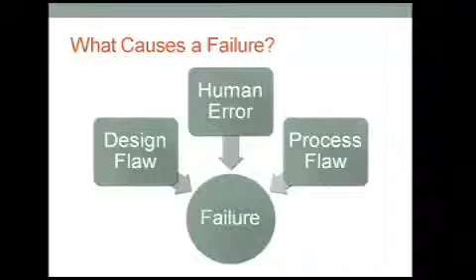Now, when you look at this simple diagram, the mirror image of it represents the components to success. What are the components of success? A good design, a good product that you're using, a good process that you're using to assemble the products, and of course execution - flawless execution. Those things are pretty critical. What I want to do is take a look, in terms of those simple concepts, at what apparently went wrong on this well, and then how we build our practices going forward to try to keep this from going wrong again.

Okay, first off, and this one has been overlooked and maybe not stated as clearly as I'm stating it right now: the float equipment failed in the well. To me, that's very, very obvious as a drilling person. The float equipment failed. If the well blew out up the casing, the float equipment is there as a barrier, and it failed. Why did that happen?

Is there a design flaw in that float equipment? Were there process flaws that were involved in the selection of that particular piece of float equipment? Did something go wrong there, or was there simply a human error in the installation of that float equipment that kept it from working properly?

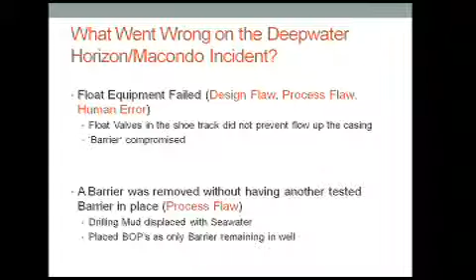When the float valves in the shoe track don't work following a cement job, that is not a good situation, and it's even worse when it goes unrecognized, which is apparently what happened in this well. So there's one barrier compromised. Did it cause the incident? No, it's the kickstart to the incident right there.

The second one that I have listed here: a barrier was removed without having another tested barrier in place. Throughout my career, that's what I was taught not to do. One of the fail-safe practices and processes that we have to follow as a drilling engineer is to make sure that if you remove a barrier from a well, there's another barrier in place before you remove it. That's a process you have to follow to make sure that works right. And that clearly failed in the Macondo.

And that one is a pure process error. The sequencing of removing the drilling mud from the well and putting seawater in place was wrong. And that's a very severe flaw.

Now, as I'm going to show in a little while, these are issues, when you start having process issues, that at some point the regulatory agencies have to come in and help prevent these types of process flaws. And when that happens, when the drilling mud begins to be removed, you've already compromised one barrier in the float equipment. You take the drilling mud out of the well, and the last barrier in the well becomes the blowout preventers.

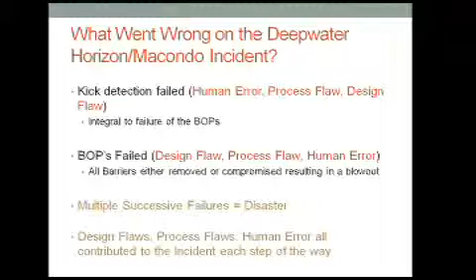And I'll talk about that again in a second. And then finally, the BOPs failed. Now this, from my perspective as a drilling engineer, and a man that's been on the rig as a company man and has had people working for me that I've known for years as company men, that's a very terrifying thought to have a BOP fail on you, because that is your fail-safe.

So my question really is, what happened with the BOPs? I don't know that answer yet. I haven't seen any study outcome of what happened with the BOPs, but it's a very, very worrisome topic that you went to function the BOPs and they didn't work.

And of course, in that system, is there a design flaw? We need to know that. Is there a fundamental design flaw in the way the BOPs were thought out that doesn't work in deep water subsea environments? Was there a process flaw? Were there process flaws in the way those BOPs were tested? Are we testing our BOPs correctly? And that's a comment I'll further in just a second.

And then, of course, finally, is there a human error component? I would say in both of the cases of the kick detection and the BOPs, the kick detection I think is primarily human error and process error, probably equal amounts of both of those. But with the BOPs, I think design and process are probably the two key points of those failures.

What happened now involved multiple successive failures, and people said this from day one of the blowout. This wasn't one thing that went wrong. There were multiple successive failures that led to this disaster. These are the four successive failures that happened, in my mind, and this is not an overly complex set of conditions that led to the blowout. This is actually a fairly simple explanation of what went on, other than the BOP failure. But if you look at it, there are design flaws, process flaws, and human error every step of the way that led us to the point of the blowout.

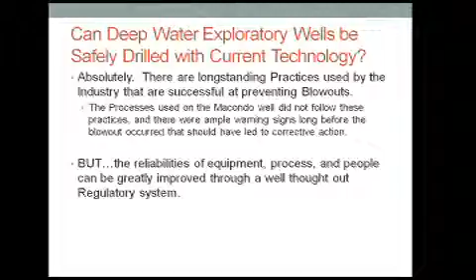Okay, in a conclusion slide, one question: can deep water exploratory wells be safely drilled? Yes, we've done it. There are a number of people sitting in the room who say, I do this every day. Is it 100%? No, I don't think so. I think there are people out there that don't have the capacity to do it safely well after well. And I think we're going to have to work with the government, with regulatory agencies, to get the reliabilities in our designs, our process, and our people up to speed to make sure something like this never happens again. Thank you very much.

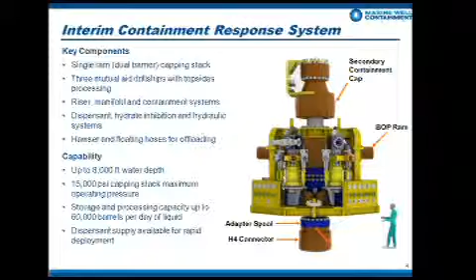A dedicated dispersant supply will be part of this system and will be available for rapid deployment.

The expanded response system has similar features, and I should say that some of the equipment in the asset inventory for the interim response system will move to the expanded response system as we get other assets for that system built and ready for deployment.

But one main difference is the capture vessels. For the expanded response system, the capture vessels are dedicated vessels, whereas before it was drill ships through mutual aid. In the expanded system, we'll have 2 modular capture vessels. I'll speak in more detail about them on a later slide, but they are dedicated for the service in the expanded system. They'll need to be modified for topsides processing facilities, and that's part of the scope in the project development of the expanded system.

This system will have freestanding risers and manifold systems, enabling it to operate in deeper water depth. It will also have a 15,000 PSI subsea containment assembly, which in the expanded system is a 3-ram or 3-preventer type capping assembly, whereas in the interim system it was single. The storage and processing capacity in the expanded system is up to 100,000 barrels per day of fluid, and again the dispersant supply is dedicated and available within this system as well.

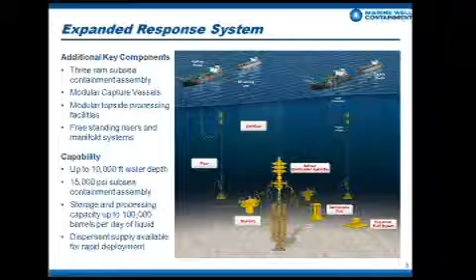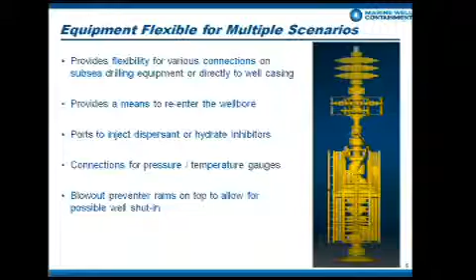I mentioned the word flexible in an earlier statement, and that can be indicated by at least a component shown on this slide. This is a depiction of the ultimate expanded system capping stack. The idea is that we will have adaptation for this capping stack to be configured or mated to whatever the conditions may derive on the day of deployment.

It will provide a means to re-enter the wellbore. It will have ports for injection of dispersants or hydrate inhibitors, and connections for pressure and temperature monitoring devices. Obviously we'll have containment type preventers in the stack to allow for a possible complete shut-in.

Some modifications are required, namely dynamic positioning systems, and these vessels need to be outfitted with topsides appurtenances to accept processing modules that then connect up to subsea riser systems, allowing the contents to flow to the capture vessels to be separated, the oil and gas separated, the gas flared, and then safely stored and offloaded to a shuttle tanker.

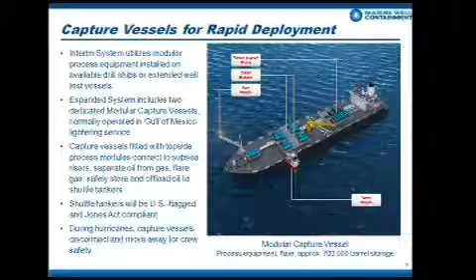Clearly, to operate in the Gulf of Mexico, we need to be configured to manage weather events such as hurricanes, and these capture vessels will be outfitted in a way where quick disconnect can be managed safely, reliably, and without additional incident complications, to move away from the weather-affected area and get the crews to safety.

Well, that's a quick run-through of what the company is about and the system that the company is interested in and also diligently working toward. Our view is that the company and that system will provide us a solution to meet the containment requirements and response requirements that we see in our drilling permit application requirements today.

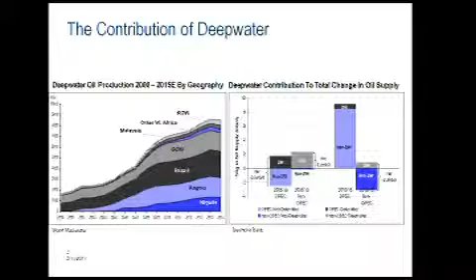I think we heard very succinctly this morning about what's at stake when it comes to deepwater. You can see the remarkable growth on the left-hand side of the plot of deepwater production from the turn of the millennium through today, and this graph forecasts 5 years into the future as well. On the right-hand side, this analyst is forecasting that deepwater will contribute about 25% of the incremental net oil production over the next 5 years. So there's a lot at stake, as was said this morning.

With regard to technology, when you look at the graphs I showed you, particularly the one on the left, you could conclude this is a new industry, and in fact it's not. The offshore industry has been around since before the turn of the last century, 1897, as you can see, and even earlier than that. And as pointed out this morning, just over 60 years ago, the first well was drilled out of sight of land, a very important point in the offshore industry.

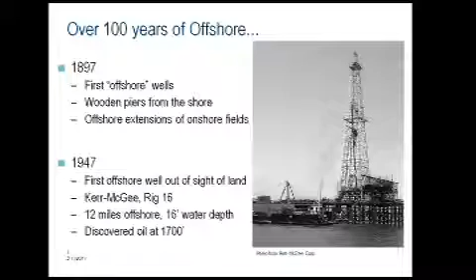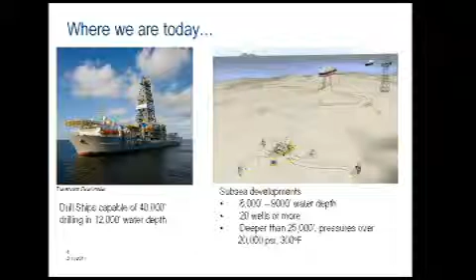So where are we at today? To me, the technology we're using offshore is extraordinary. Really, what the industry has been able to achieve is absolutely remarkable. A state-of-the-art development today would be in 8,000 feet of water, with 20 or more subsea wells, pressures at the reservoir—not at the wellhead—of 20,000 psi and greater, and depths certainly over 20,000 or 25,000 feet.

There's obviously a lot of challenges involved in offshore deep water drilling, and we chronicled some of those earlier today. I should point out that the sector of the industry I'm involved with is very much the subsurface. The challenges I've detailed on this slide are specific to drilling, and don't encompass challenges around exploration, development, production, or long-term life of the well. But as you look through these challenges, particularly on drilling, you can see there's an awful lot that faces the drilling engineer, as we heard earlier in the sessions.

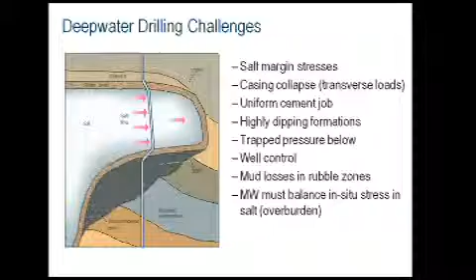In this particular case, for example, we might be required to drill through thousands of feet of salt. As we exit the salt, we go into a different type of formation, often a rubble zone, and often a zone of lower pressure than what's required to drill through the salt. As a consequence, you end up with significant losses of mud, and that's just one particular example.

So in the context of the panel we're in right now, I thought I would describe at least one technology, in maybe a little different direction than some of the others have taken, that can help manage and mitigate risk in deep water operations: the ability to understand what it is that you're going to face as you're drilling through the formations. In other words, the ability to plan, to map out, to look ahead, and understand precisely when you're going to hit one of these transitions where things may be overpressured or underpressured, which may eventually result in issues that require a sidetrack, or worse, an abandonment of the well itself.

One of the technologies often touted as one of the most significant game-changing technologies in the industry, and certainly very few in the industry wouldn't rank it in the top 10, is 3D seismic technology. That's the ability to send acoustic information, or sound waves, through the formation, or in the offshore environment, through the ocean and then through the formation. That sound bounces off all the various formations or strata underneath you, and sends back thousands, millions of signals to an array of receivers at surface, called geophones. That information is compiled and analyzed with a series of complex algorithms, and with that information we can construct a picture of what's below us before we ever go there.

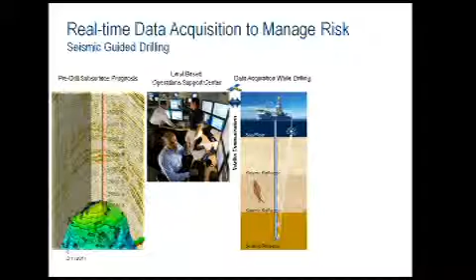And the model becomes more and more precise as you get further and further into the Earth. As a consequence, in this particular example, we have this formation of interest, which was originally picked at 30,000 feet, has actually been migrated up to 29,000 feet well before we actually got there.

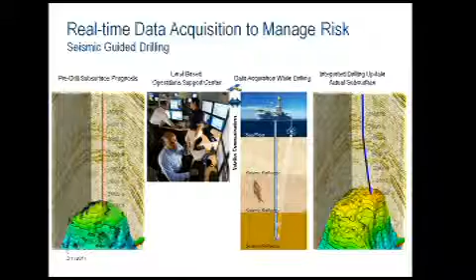I think a good analog to this is like headlights at night. Without them, there's very little that you can see. With them, you still don't see the mountain range that's 10 miles ahead, but you can certainly see around the corner before you get there. But the real point of this, and this is just one example, is I feel an area of technology that's quite important is understanding where it is that you are before you actually get there, so you can design that into your programs well in advance. The example I gave earlier, exiting the base of salt - if you're prepared for that, an operator can quite easily and safely and consistently make it through the base of the salt. If you're not, it historically has caused problems in the past.

Looking forward, as mentioned even by Director Bromwich earlier, there's a very good chance that we're going to go deeper, to older geologic time horizons. When you look at the technology, at least in the sector of the industry that I'm involved with, that has implications. We're going to have to image deeper with higher resolution, and that will be a challenge.

But another more practical matter is that the pressures, and in some cases the temperatures, of these formations are going to be higher and hotter. So the tools we use to acquire this data and drill, and the way we complete these formations, will have to be capable of doing so in those higher pressure, higher temperature environments. A big part of our new product development program, and the new research in the industry, is around developing that higher pressure, higher temperature equipment. You'll see quite a bit has already come out over the last several years, and much more is to come.

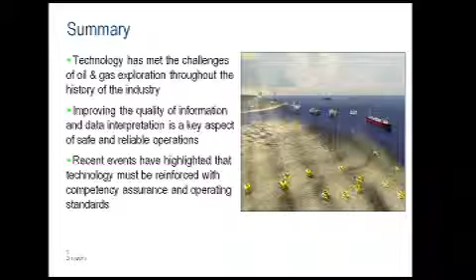So my last slide is really a summary. Technology has gotten us a long way — it has advanced us from the early days of the piers we built offshore to where we are today, and I stand by my statement that the technology in use today is extraordinary in deep water offshore. The quality of the information and the interpretation of the subsurface is quite important to make sure we understand what we're getting into before we get there. Equally important is the hardware talked about earlier today in terms of containment and prevention. And lastly, technology is quite important, but if it's not underpinned by consistent processes and standards, technology alone is not going to get us there. So thank you very much.

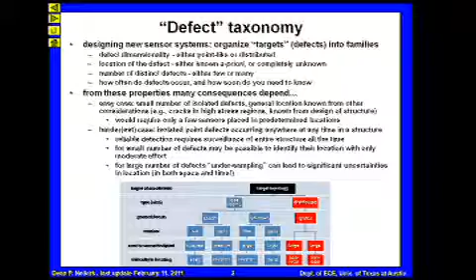Do you know where the defect is? Do you already know it a priori, ahead of time, by design of the structure, for instance? Or do you have no clue where it is? How many defects are you looking for - one, if they're point defects, one or a whole lot? And how often do they occur - once, or all the time, or once a month?

All of these things lead to a lot of situations if you're trying to design a new sensing system. The easiest case would be a small number of isolated defects where you know where they are. So by design of the structure of the well, hopefully you know where the float valves are, although you might not even know that. For cracks in structures, if it's a designed structure, you probably know where the high stress regions are and where to anticipate cracks, so you put a few sensors there.

The hardest case, I think, is where you have the possibility of many defects, you have no idea where they're going to occur, and no idea how often they're going to occur. Now, if it turns out there's only a small number of them, you might find them with only a moderate amount of work. If there's a whole lot of them - and we just saw an example of this - when you start looking, you have to use a model to back calculate what happened. And you always get less data than you need. That's undersampling, and that means there are always uncertainties. And then, of course, the question is, how bad are they?

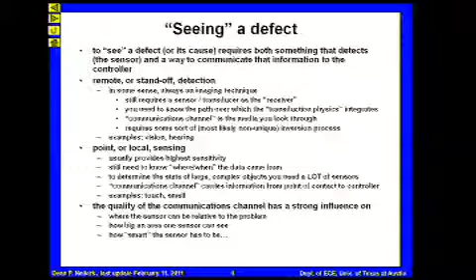You do have to know the path, and the example we just got was if you don't know the path, you don't know what's going on, so you iterate back and forth. That's a good idea, but it requires you to communicate through some medium, and that's one of the big problems, the communications channel you use to get information back and forth. It's all about how good that channel is.

Examples: vision and hearing. You know what the problems are with vision. I can present you with an optical illusion, and what it is and what you see are not the same. Same thing with hearing, obviously. The medium impacts things. If you look at a pencil stuck in water, it looks bent, right? Because you don't know what the medium is.

So there are real problems in using remote sensing. It's great if you can do it, but it's highly dependent on the communications channel. Point or local sensing is nice if you can do it, because it's where you need it to be.

It's usually the highest sensitivity. You still got to figure out where it is if you didn't put it there ahead of time. If you want to do a big structure, you'll need a lot of point detectors, so there's a complexity there. The communications channel still has to be there. You got to get the information from the sensor to wherever you want to use it.

There, the examples I use are touch and smell. Your finger is a point sensor, it feels where you touch. Your nose is a point sensor, it detects a molecule that has been transported to your nose. The quality of this communications channel, though, is extremely important in determining where the sensor can be relative to a problem, how big an area a sensor can see, and how smart the sensor has to be. I'll come back to that in just a sec.

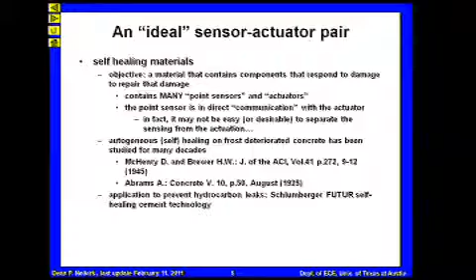An example of this is so-called autogenous self-healing in concrete. That's been studied for over, now 90-ish years, for frost damage. There's been a lot of interest in this, and Schlumberger has a new product, the FUTUR self-healing cement technology, which has materials added to it that expand when exposed to oil or gas to try to plug the crack if there's a void or a crack that forms later. It's a great example of what you'd really like if you can get it.

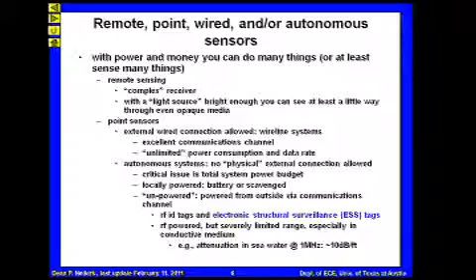Now, another issue here is what can we manage to do? I do a lot of work in civil infrastructure as opposed to oil exploration. In that case, one of the standard statements is with power and money, you can sense just about anything. By power, I mean how much power you have to run it. By money, I mean how much it costs to install it. In civil infrastructure, money is a big determiner of what you'll put into a civil structure.

If you're doing remote sensing, you probably have a complex receiver. Your eyeball is a pretty complex receiver. In terms of the power issue, though, if you've got a bright enough light bulb, you can see through even muddy water, at least a little ways. So there's still a power issue when you deal with a bad communications channel for remote sensing.

For point sensors, the traditional way in the oil business has been to use wireline tools. The nice thing about wireline tools is that essentially you have a really good communications channel, the wire, and you have an easy way to supply power to the tool, the wire. So wireline tools are really nice, again, if you can use them.

I don't know exactly how you use a wireline tool during a cement job. I just don't see how you can do it. I don't think you do. But if you can get away with the wireline tool, it's great. To do the cement survey after emplacement, it's a wireline tool, an acoustic wireline tool.

The other possibility is you try to go for something fancier, which is a completely autonomous system, a complete sensor package that has no external connection to the outside world. And if you try to do that, it's all about power. The power budget is everything.

You've either got to put a battery on it or it's got to scavenge energy from the environment, neither of which is very good—you just don't have much power to work with. Another possibility is a sensor package that doesn't carry its own power or scavenge it locally, but does it remotely. A good example many of us are familiar with are RFID tags, toll tags, which are powered by the transmitter you drive under.

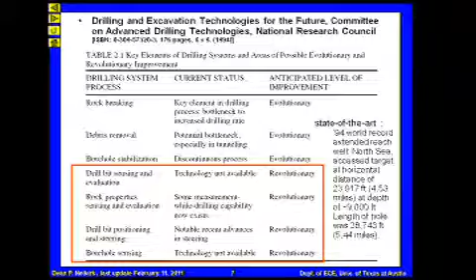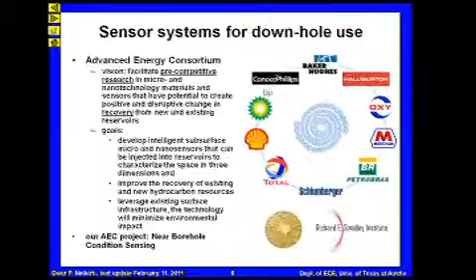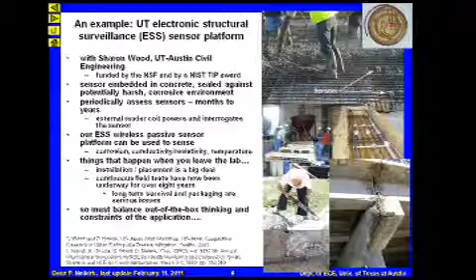Just as an example of the kind of things you can try to think about—it's not directly applicable, but not completely inapplicable—here's a civil system: bridges, concrete. In the lower right-hand corner you'll see an example of corrosion damage in a bridge pier, and the interest is to detect that before it causes spalling, before the concrete falls apart. We've done a lot of work with sensors that have to be placed in concrete to try to come up with a way of reading through the concrete to detect corrosion, for instance. We've also done conductivity and some other things. It's an example of trying to come up with sensors you can use in a harsh medium.

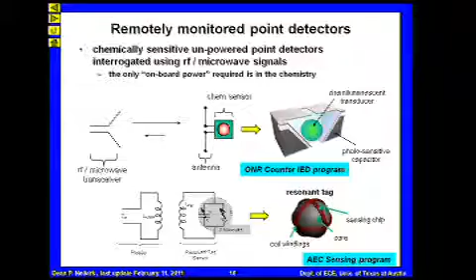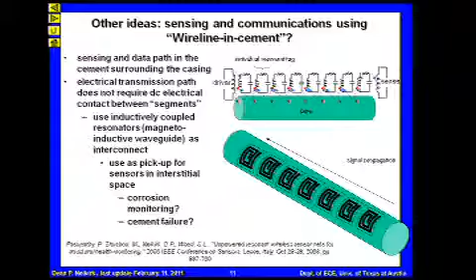Other things we might try to play with: the cement job was clearly an issue, and one of the questions is, can you put something in as an admix? Ideally you'd like it to be an admix in the material, but could you put sensors in the cement? It's a tough problem. Can you instrument the casing? That also, I think, is a real problem from the perspective of placement and damage done during the drilling operation. I think it's going to be a really hard problem, but one well worth looking at.

Doing all this, you've got to know where things are—if you're placing these sensors after the fact, for instance mixed in the cement, you pump it in. If you don't know where things are, it's not going to do you any good. And knowing where is a really hard problem from an instrumentation perspective; you need position and time.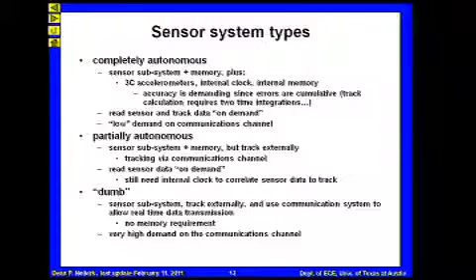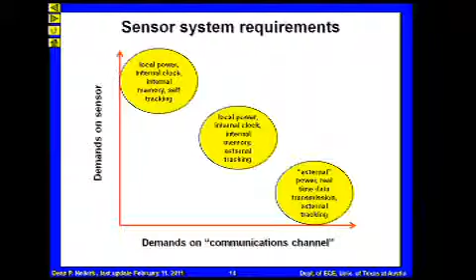If, on the other hand, the communications channel is not so good, so you're somewhere in the middle, then you have to put more burden on the sensor package, and that's going to get harder. If you're in the earth, where the only thing that propagates very well is acoustics, and even that can be challenging, then you've got to put everything here. One of the things we're struggling with is trying to figure out a way of honestly finding a different...